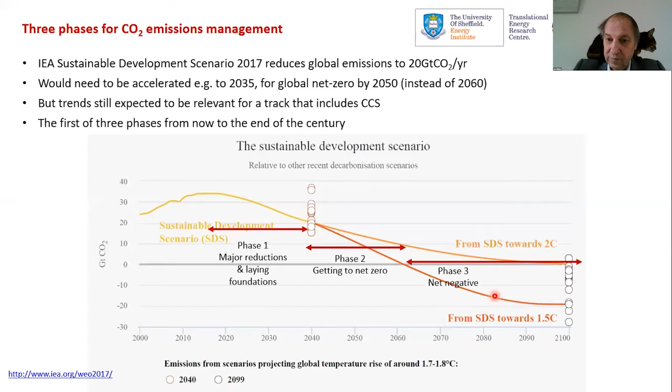Coal is still getting a lot of attention as the villain of the piece on CO2 emissions, although in fact it's not much more than oil in aggregate now.

One of the features you will see, though, in this scenario, and I think this again is something that we can expect to see delivered, is that when you get this downward pressure on demand for oil, demand for coal, and indeed in some respects demand for gas, you see that the prices are soft. Essentially, for all of the commodities in this sort of market, the expectation is that the prices won't increase rapidly. In some cases, they'll go down.

And that, of course, has significant implications for carbon capture and storage power generation, because these are the fuels that will be used in CCS power generation. So, as I say, any scenario, not just this one, that shows severe downward pressure on emissions and lack of unabated use will also naturally tend to give low fossil fuel prices and hence relatively low CCS costs.

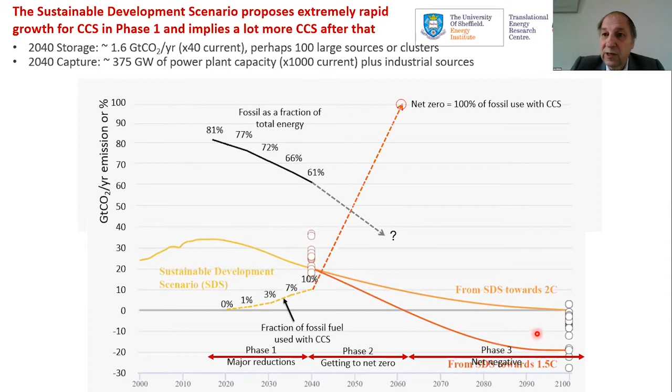This is the energy that's produced. This is the capacity that produces it. So obviously for intermittent renewables, solar and wind, there's relatively more capacity than there is energy generated. Similarly for CCS on coal, as we'll see, I'll discuss it a bit more, there's quite a lot of coal capacity, not so much coal with CCS capacity, but that actually generates a lot of the energy. For gas, there's still a lot of energy generated from unabated capacity, though even there, the gas CCS has a higher load factor.

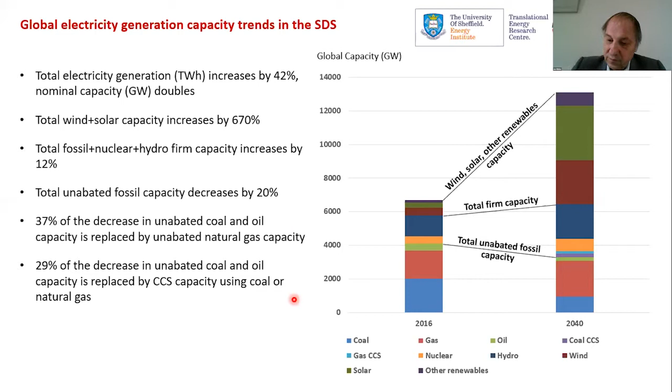Looking at a little bit more detail at coal, because I think it's a good model for what will happen also to gas in the second phase. This is where we were in 2016, not very different now. We've got about 2,000 gigawatts of coal capacity globally, with an average load factor of about 50%. Rather less than half of that is closed in the scenario. Some of it's fitted with CCS, 15%, and that runs with a load factor of 69%.

The rest of it essentially is turned into peaking plant. It's there, it's been paid for. You wouldn't build it as peaking plant, I don't think. It'd be far too expensive, but given it's there, it's reliable. In many cases, you're not even reliant on a gas transmission system. You have a stockpile of coal, which you can use, so that's very good. It's run as peaking with an average fleet load factor of 11%.

And that shows even more here, as I said, this is the total generation from coal, the energy now. There's a big reduction in electrical energy produced from coal, but a lot of what's left is from CCS plants, and there's a small amount from the peaking plants. So a lot of capacity, not doing very much generation, but providing an important service to the grid.

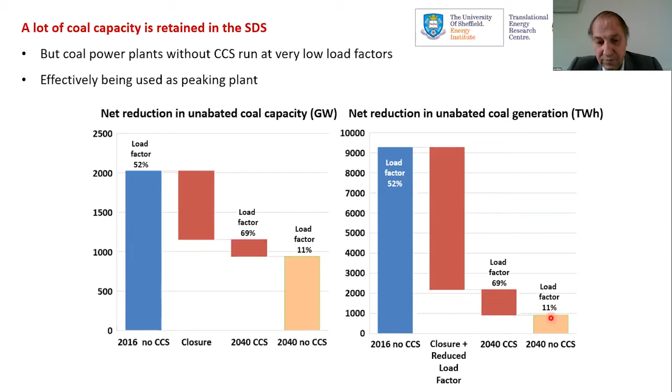In the UK, January, very little solar power, and we sometimes get anticyclones where we get very nice, dry, cold weather with little wind for several weeks.

I usually get very good snow then. You go and have a lot of fun outdoors. It's a little bit like being in Scandinavia. It doesn't last for long.

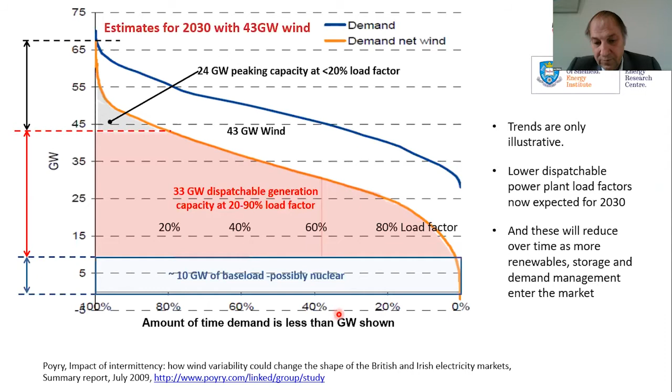So, capture from power plants, what are the characteristics? So in this phase one, where we're seeing the first major reductions and laying foundations for future generation, we expect to see capture on dispatchable power plants with all fuels, probably limited base load. Capture may be stopped for short periods to allow more power to be sent out, but all the plants have to switch on and off. Getting to net zero, you're going to be looking at these peaking power plants, because you've got to go for all sorts of emissions. I don't think that you'll actually, on many of these, capture a lot of the CO2 at source.

You want low load factors. The running costs can be very high, but it's important to keep the capital costs as low as possible. So options there include hydrogen with storage. It's very important that you have hydrogen storage, otherwise your capital costs will go up. Ammonia, we've heard mentioned, biofuels, or synthetic fuels made from CO2 taken from the air.

But actually, if you're going to do that, and this is something that hasn't received enough attention, but it's an obvious way to do it, you can just carry on using fossil fuels, and then instead of taking CO2 and turning it into fuel, which is relatively expensive, you can just bury it, put it away permanently, return it to the geological storage that it came from. So fossil fuels plus carbon dioxide removal via BECCS or DACCS is also a possibility to achieve net zero with these peaking plants.

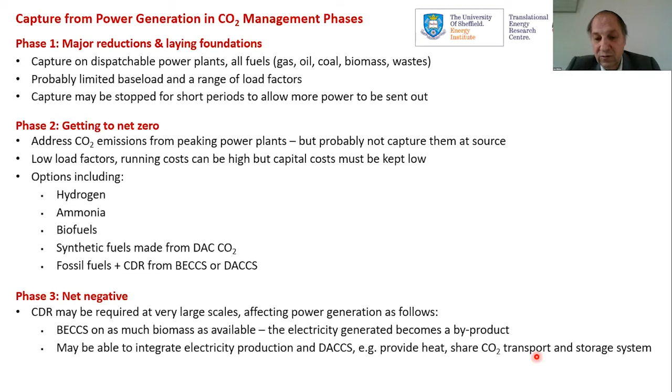So just drilling into a bit more detail, a point we've already made many times, if you're in phase one, power plants have to be dispatchable. As the load factor reduces, obviously capital cost becomes important, and thermal efficiency has a secondary impact, especially at lower fuel costs. You do have to be able to meet periods of peak emergency demand with these dispatchable plants as well as with the peaking plants. There may be some benefit from time shifting the capture penalty if you can do that.

When you're heading for net zero, perhaps not in this first stage, you will need to capture as much CO2 as possible, maybe as much as 99%, which is effectively all of the fossil CO2 from natural gas, or you have to be able to upgrade the plants to do that. People are very concerned about other pollutant emissions as well as CO2.

And in some areas, CCS raises questions about water demand, although the answer to those questions is just appropriate engineering of the plants. Except in some cases, and I think we'll hear more about that, you may well be able to harvest some water from CCS, either in the capture plant or also if you're injecting water into saline aquifers, you may use the produced water.

So just looking at some characteristics, these are from a published study by Wood, formerly AMEC Foster Wheeler, for our energy ministry. This information is available. You can download all of the details and the cost calculation spreadsheet. These are their estimates of the performance of various CCS power plant options.

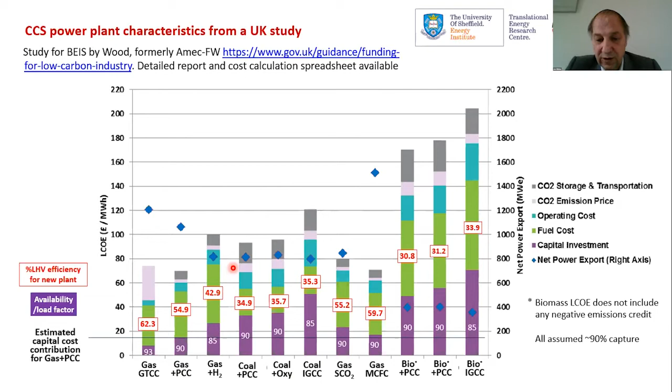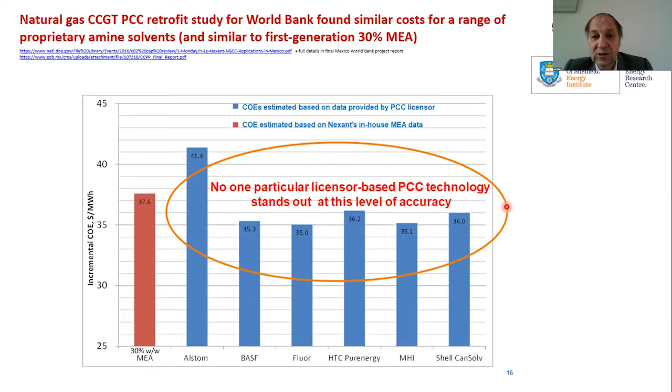So interestingly, when you get down to it, particularly for natural gas, where you're not very sensitive to the energy consumption, there appears to be little difference between the amine offerings when you apply a standard method. If you're more interested in post-combustion capture, where the default would now be 35% by weight MEA, which is a little bit less energy, more compact plant, then we have an open access study there, which is available to look at.

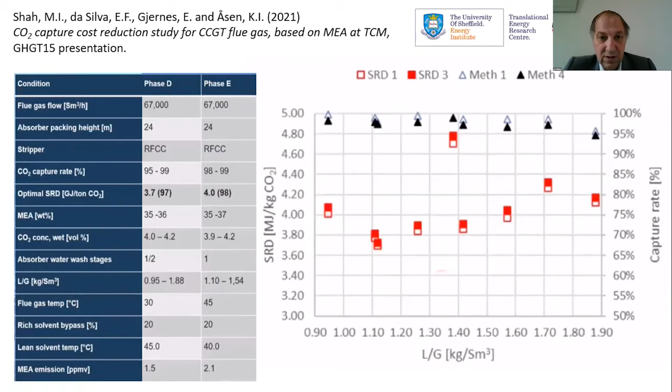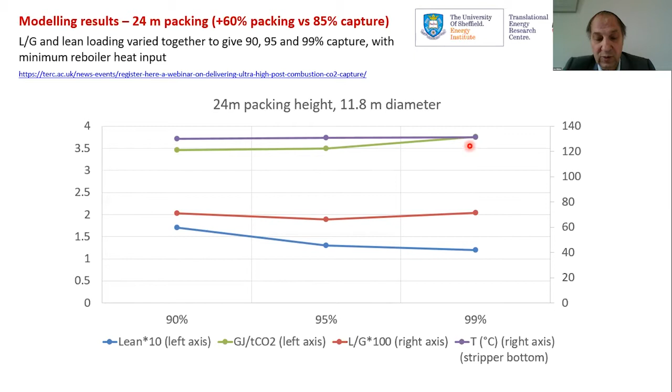Capture levels are also important, and we've just recently seen published levels of capture in the high 90s, above 95%, from actual tests at Test Centre Mongstad, so that's very good. And we've also verified that, mimicked that using modeling at University of Sheffield. And this is taking capture up from 90% to 99%, and the energy requirement, which is the green line, goes up slightly, but not very much. And when you compare it with air capture, it's quite a good deal.

I said you need to stop and start plants. With post-combustion capture, an easy way to keep on capturing while you're doing that is to store the solvent. Store lean solvent and rich solvent, run it through the absorber, and you can keep the same high capture levels all the time.

Some things going on globally. The UK, as I say, we've got lots of different options we're looking at, but it's changing rapidly. It's a competitive situation. The US, there's multiple FEED studies going on for both gas and coal plants. Petra Nova was a coal plant with CCS that was run but is not now operating. And they had some bad experiences with gasification. Canada, there's the Boundary Dam coal plant operating. Netherlands is looking at post-combustion and waste. China is considering coal post-combustion capture retrofits, and they're actually helping Australia as well, the Huaneng Group, with a proposed retrofit. And Japan has a biomass retrofit plant. And there's a number of references, but as I say, it's very hard to keep up to date with what's going on. It's a fast-changing situation, and it's competitive as well, so you don't hear everything.

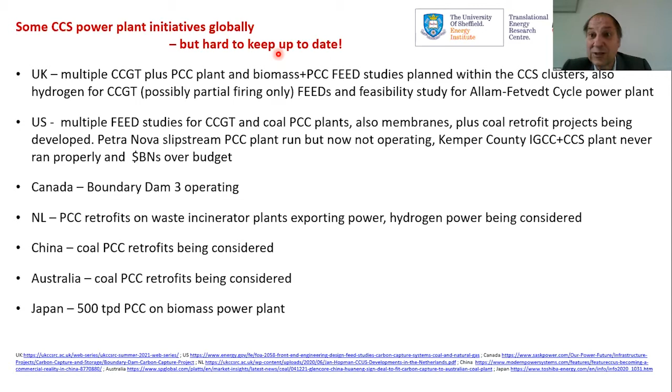So, final words. Power plants with CCS are very important to help deliver net zero emissions. Now they'll, I think, mostly all need to be dispatchable. There may be retrofits on all sorts of power plants, coal, gas, biomass, and oil plants. I'd expect new build gas and biomass plants. Currently, most of the projects being talked about use post-combustion capture using amines, but any technology that can offer reduced capital costs will be competitive. Efficiency, though, I think is going to be less important. However, the capture level is important. We're heading for net zero. The alternative, if you don't capture it on the power plant, is direct air capture or BECCS.

And then pre-combustion capture for power. In principle, it looks attractive because you've got concentrated CO2, but it does appear to be more expensive, except possibly hydrogen for peaking plants with storage. And also, we will expect to see hydrogen use in turbines for power generation where you can't do CO2 transport and storage. So it will happen, but it's not necessarily the cheapest way.

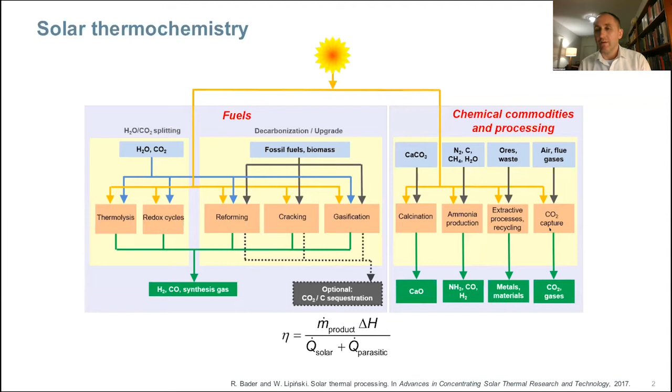or separations of gases. And the third area, not shown in this graph, is thermochemical energy storage that matches concentrated solar power plants or industrial processing systems powered by solar thermal energy at high temperatures. Now, the solar-driven calcination-carbonation chemical looping is a closed loop process, as the name says. So we use a metal oxide, and this metal oxide or sorbent is generated in the endothermic calcination step of a carbonate. Now, this process is typically highly endothermic, and it can be matched with the high temperature heat provided by solar thermal systems.

Now, depending on the application, we may have different streams of carbon dioxide into and out of the system. For example, if we just separate CO2 from flue gases, this pure CO2 can be used for production of solar fuels, for example, towards solar synthesis gas for renewable kerosene for aviation.

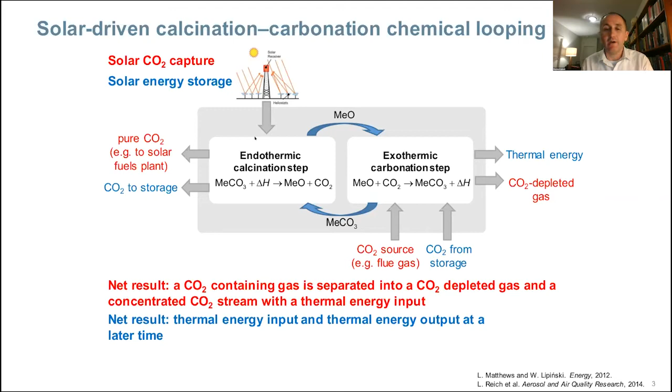Different metal oxides have been proposed for this process: calcium, strontium, manganese, magnesium, barium, and others. As I mentioned already, they have high theoretical storage and capture capacity. For example, for calcium carbonate, this is 1778 kilojoules per kilogram, which is 3 to 4 times the energy density of commercial molten salt storage that typically matches concentrating solar power plants. Calcium carbonate is abundant and low cost, but there are challenges with loss of reactivity and material degradation, and we need to develop high temperature solar reactor technology, which is not trivial.

Now, I will guide you through this process and the different challenges in realizing solar-driven chemical looping processes by considering different length scales, from the smallest scales typical of sorbent particles, through groups of particles such as packed beds or fluidized beds, to the solar reactor level. And I'm going to show you some examples. So let's start with analyses typical of sorbent particles. At this level, we are interested in investigating the effect of properties of individual particles, such as their internal structure, porosity, and overall size, on the extent of chemical reactions, both for the calcination and carbonation steps.

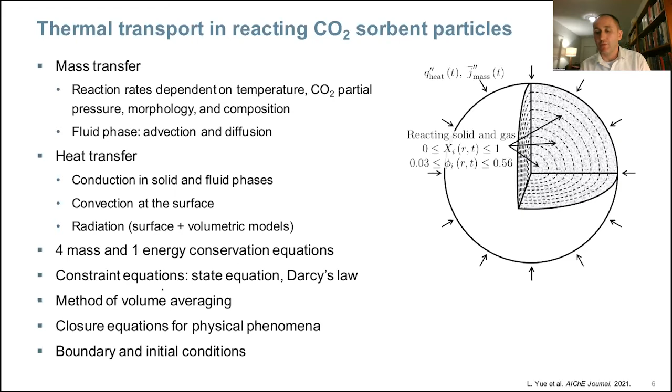And here we have used combined numerical and experimental methodologies. On the numerical side, we have developed heat and mass transfer models coupled to the chemical kinetics of calcination and carbonation, with realistic properties corresponding to those of single calcium carbonate or calcium oxide particles. Now, modeling itself can be quite off from actual results if our input data contain some uncertainties. So it's important to also conduct experiments to validate these models.

We have developed a quite fine setup that uses a thermogravimetric analyzer in which we have individual particles placed in the crucibles. And here you can see the particles actually after cycling, after calcination, when they develop a crust of carbonate around those particles. So these are two examples.

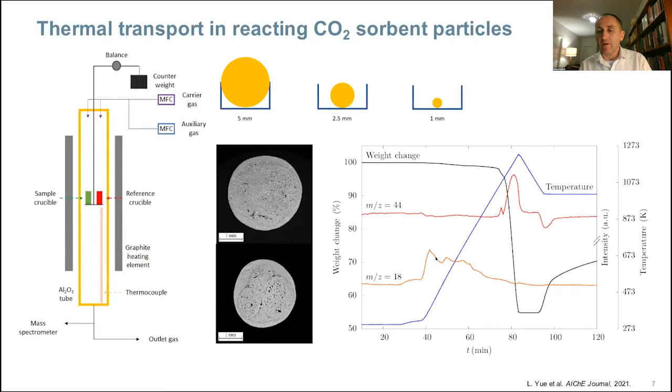You can see here the weight loss for a typical experiment. So first we have calcination, and then we have carbonation. We have here also two signals on the mass spec for carbon dioxide and for water. There is usually water in the initial step of this multi-step process, that is water bound in the structure of the carbonate itself.

Now, when we compare the original simulation results to the experimental results, we can see that, and this is not surprising, there is typically some discrepancy. So our sophisticated model was tuned by scrutinizing some of the input parameters and properties, and eventually we were able to match the experimentally measured results. In this case, this is the overall extent of the calcination reaction, followed by the extent of the carbonation reaction. So the match is good, and it was tougher actually for the carbonation step than for the calcination step.

Once the model was adjusted, we were able to predict the behavior of these individual sorbent particles as a function of their size, as a function of the composition of the reactive gas atmosphere, with variations of the CO2 concentration from 25 to 50 to 100% for particles of selected size.

So now let's move on to the next scale. I'm going to show you this next scale that is weakly coupled to the smaller scale, which means we follow the hierarchical coupling process in the overall analysis, but the links between the scales are still very challenging. We deal here with very disparate length scales.

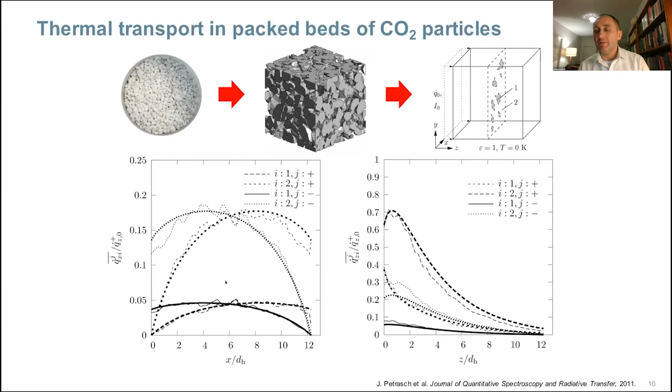I'm talking about solar thermochemical looping, which means the process is driven by concentrated solar radiation, and radiative properties are very important for precise modeling of the systems. So with this approach, we can actually achieve quite good accuracy of the radiative and other characteristics of such packed beds that can be used in simulations of scale-up systems at the reactor levels.

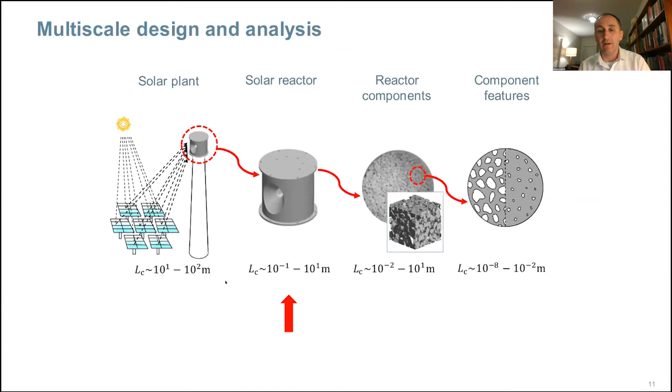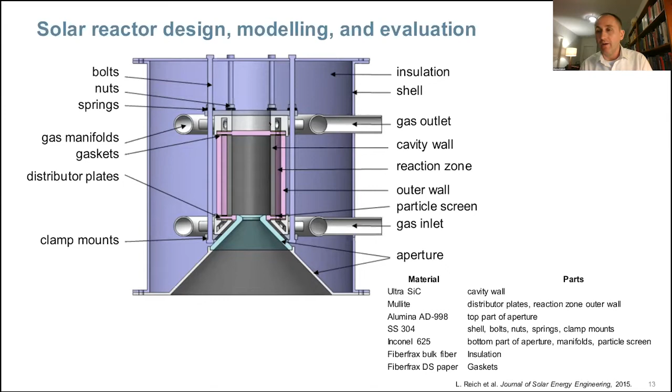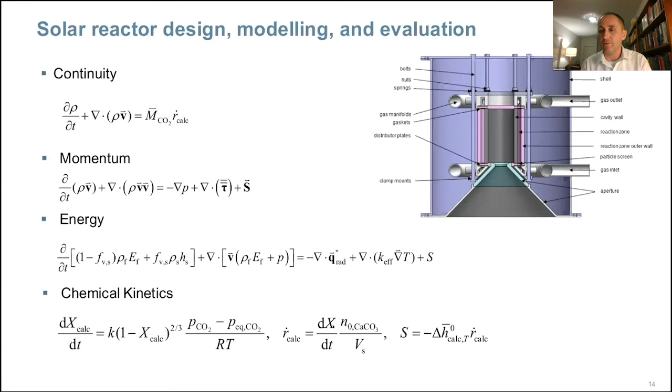Again, we developed a comprehensive heat and mass transfer model based on the continuity, momentum, and energy equations coupled to chemical kinetics of calcination and carbonation. This model was implemented in ANSYS Fluent with extensions to account for radiative properties and reaction kinetics through user-defined functions. And here I'm showing sample results.

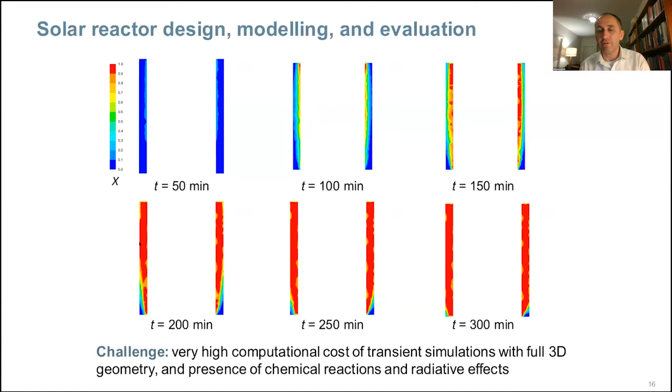These simulations are extremely time consuming. Even with vast computational resources, 3D geometries in presence of nonlinear kinetic effects and radiative transfer effects require days to complete single cases. So now let me show you the experimental setup that we have prepared to test the actual reactor prototype. It will be tested in the new high-flux solar simulator, which consists of 18 radiation modules.

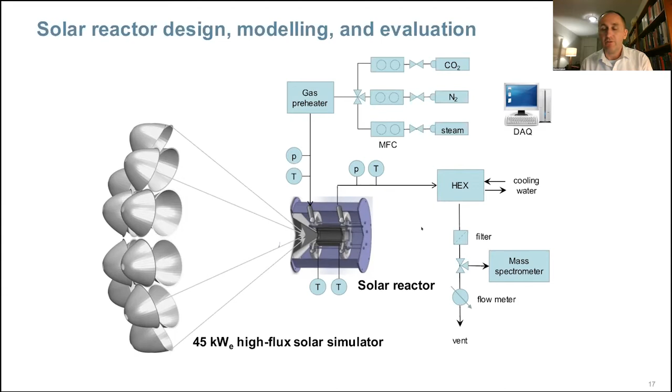The reactor will be placed in the focus, and we will have different gases flowing into the reactor depending on the process step, calcination or carbonation, where we can emulate any composition of flue gases or other exhaust gases from industrial processes. And the outlet gases are analyzed by a mass spectrometer, which will help to close the mass balance in the reactor and also calculate its efficiency.

To conclude my presentation, the calcination, carbonation, chemical looping processes are thermodynamically compatible with state-of-the-art solar concentrators. It's not difficult to achieve the temperature of calcination of 900 degrees Celsius. This is the actual state-of-the-art solar tower technology, or even now beam down technologies, which allow placement of the reactors at the ground level, and this avoids many complications of how we transport material to the solar tower.

The two-step process scales up well because the materials are low cost. These are like calcium carbonate, but they are limited only to point sources of carbon dioxide, which means these processes are suitable for carbon capture, but not for direct carbon removal from air. The reasons are thermodynamic. The concentration of CO2 in the atmosphere is so low that basically flowing large quantities of air through our packed bed of carbonate-based materials would lead to thermal losses and also to mechanical losses.

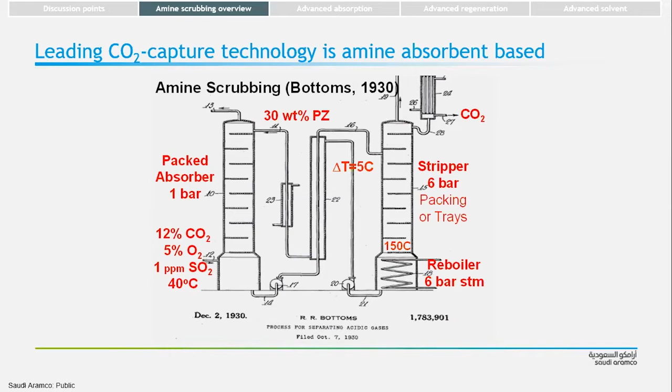More than 30 CO2 commercial applications for flue gases from gas-fired power plants are available, with more than 20 employing Fluor technology using 30% MEA. The largest of these was the gas-fired 1,000 ton per day power plant at Lubbock in 1983. MHI has more than 10 plants that use KS1, proprietary amine solvents.

Only a few plants have been constructed to capture CO2 from coal-fired flue gases. Lummus Technology owns a process that used 20% MEA in 4 operating units. Cansolv of Shell started operating an amine system at Boundary Dam, Saskatchewan in 2014. MHI also started a 4,800 ton per day capture system in 2016 at Thompsons, Texas.

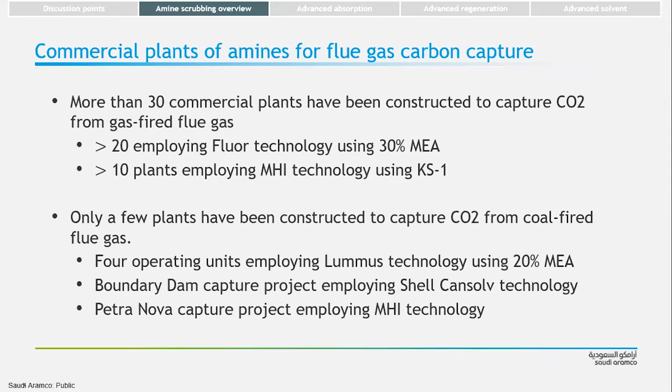Mohammed? Yes. Sorry to interrupt. Can you turn your camera on? Yeah, I'm sorry. Yeah, do you see me? Yeah, good. Thank you. I'm sorry.

4 classes of aqueous liquid absorbents can be considered for CO2 absorption and stripping. They differ in the heat of CO2 absorption, kinetics of CO2 absorption, and the intrinsic CO2 stoichiometry. The hot potassium carbonate process is offered by UOP. It operates isothermally near 100 C with pressure swing regeneration. But because its heat of absorption is low, it's unfavorable for thermal swing regeneration.

Tertiary amines such as MDEA are usually used in blends with rate promoters such as piperazine. Hindered amines like aminomethylpropanol can be used alone or in combination with rate promoters. Secondary or primary amines such as MEA and piperazine can be used alone or as rate promoters with tertiary hindered amines or potassium carbonate.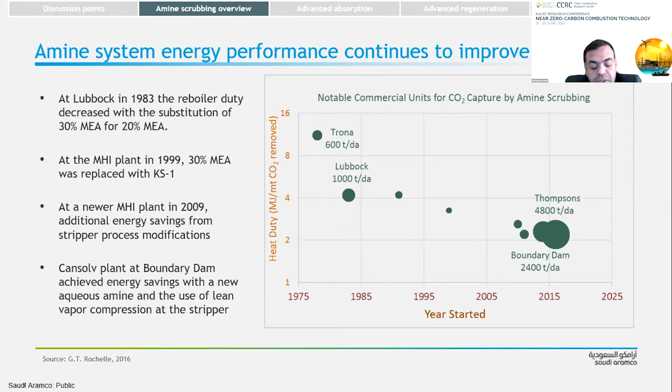The Cansolv plant at Boundary Dam, started in 2014 as I mentioned, achieved energy savings with a new aqueous amine solution and with the use of a stripper modification, lean vapor compression at the stripper, that I will discuss in the next few slides.

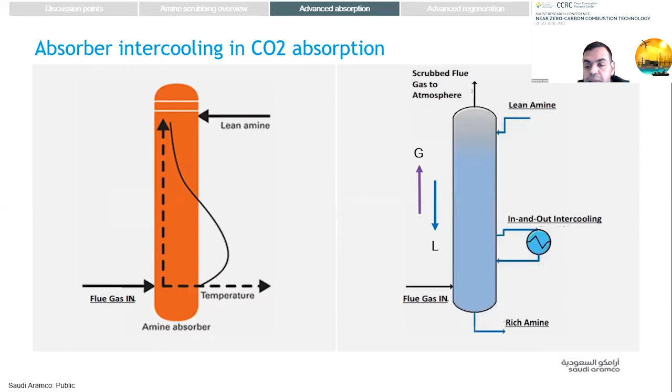CO2 absorption is exothermic, as you can see here in this figure, and results in a temperature bulge in the absorber. And the higher solvent temperature limits the maximum capacity of the solvent. So cooling the solvent at intermediate locations in the column, what we call intercooling, is going to help by removing the heat generated, which can help mitigate the capacity and driving force limitations.

This figure basically shows the trade-off of total packing area with the liquid rate. An isothermal absorber would require less packing and a lower liquid rate to achieve the same performance. In many cases, intercooling may be used to reduce the absorber packing cost and increase the rich loading. As you can see here, at a given lean loading and infinite packing area, there is a minimum liquid rate, L over G.

And similar to the distillation process, the economic optimum packing area probably will happen at a liquid rate between 1.1 and 1.3 times the minimum liquid rate.

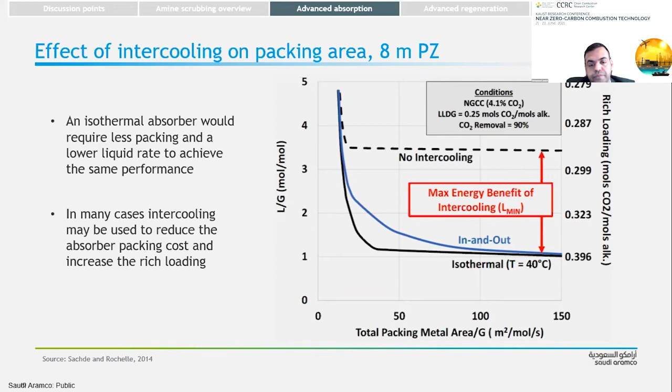This figure shows the potential effect of intercooling on the liquid rate. As you can see here, this is with 8 molal piperazine at 4% inlet CO2 concentration at a lean loading of 0.21 mol CO2 per equivalent piperazine. The minimum liquid flow rate is almost 3.5 times that of an isothermal absorber. A single stage of in and out intercooling near the middle of the column of the absorber reduces this effect by a factor of 2 at a lean loading greater than 0.26.

The contactor design for the absorber for CO2 capture has improved from that used for acid gas treating. The larger demonstrations use modern structured packing with larger corrugation angle to minimize the pressure drop while maintaining equivalent wetted area for mass transfer. The earliest absorber designs in capture systems were round.

In the SaskPower plant at Boundary Dam, Saskatchewan, the commercial scale used the rectangular absorber. The MHI design at Thompsons, the Petra Nova project, used the rectangular absorber. Full-scale commercial designs will probably use a single rectangular absorber to treat all of the flue gases from one boiler.

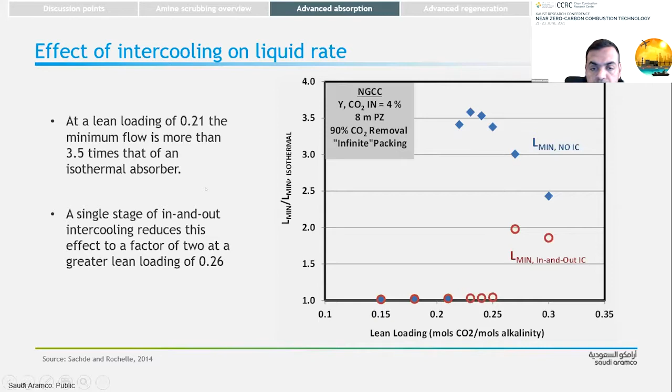So this figure compares the energy performance of 3 stripper enhancements to that of simple stripping. One issue with simple stripping is that it loses efficiency because of the water vapor that passes overhead and is condensed without heat recovery. Numerous process configurations have been proposed and tested to address this weakness. And these 3 stripper enhancements are the lean vapor compression, the interheated stripper, and the advanced flash stripper. Large-scale commercial applications will probably utilize these or similar configurations to enhance the energy performance.

And as you can see here in this figure, the selected lean loading can be used to minimize the equivalent work. At higher lean loading, the working capacity is reduced and the sensible heat requirement increases. At lower lean loading, more steam is required, basically to strip the CO2 from the amine solution. Lower lean loading also improves the rate behavior of the absorber.

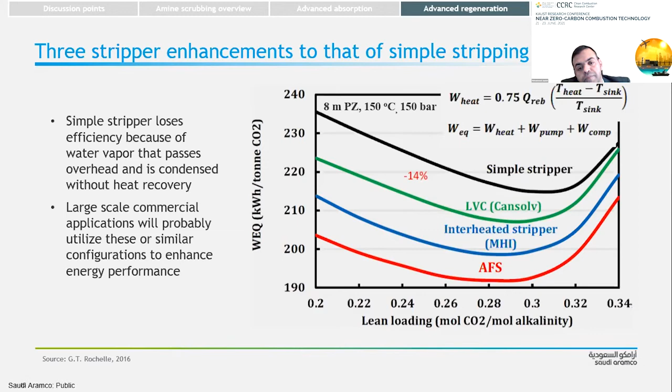This figure shows the interheated stripper. This is probably an important part of the energy savings process used by MHI in several smaller commercial units and adapted for the 240 megawatt plant at Petra Nova. Absorption liquid, as you can see here, is extracted from the middle of the stripper and pumped through this heat exchanger. And the hot lean amine solution is in series with the main heat exchanger here.

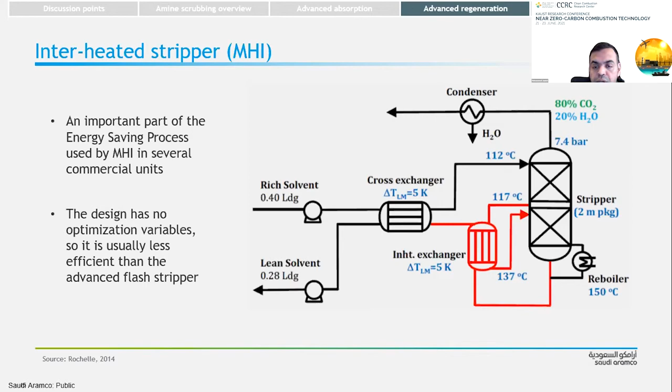It's not as flexible as the advanced flash stripper, since the compressor needs to run at a maximum single stage compression ratio of 1.8 to 2.2. This figure shows the electricity burden with advanced amine scrubbing, as you can see here. And they are approaching the minimum work to separate CO2 and compress it to 150 bar.

The 2 demonstration projects, the one at Boundary Dam and Petra Nova, are expected to achieve this 210 to 220 kilowatt hour per ton of CO2 removed. The advanced flash stripper is expected probably to reduce this burden by an additional 4%.

But these process modifications or innovations are probably producing diminishing returns, so it's possible to expect the ultimate requirement of 200 kilowatt hour per ton of CO2 with a thermodynamic efficiency of 56% for commercial units.

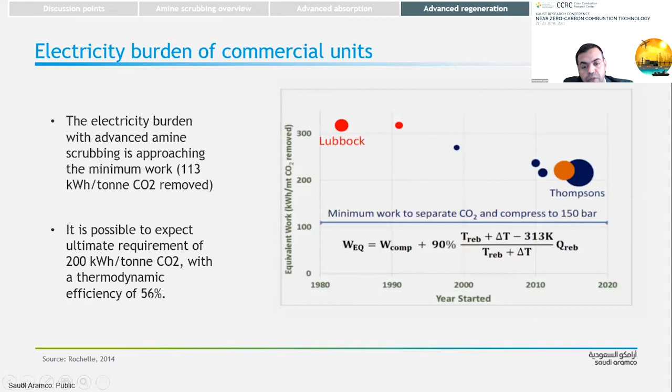The energy performance of a liquid absorbent is dominated by 4 energy properties: liquid absorption capacity, CO2 absorption rate, heat of CO2 absorption, and the Tmax from thermal degradation. The Tmax and the heat of absorption basically determine the compressor, reboiler, and stripper capital cost and lost work. The rate of CO2 absorption determines the absorber capital cost, the packing requirement, and the loss of work as a driving force.

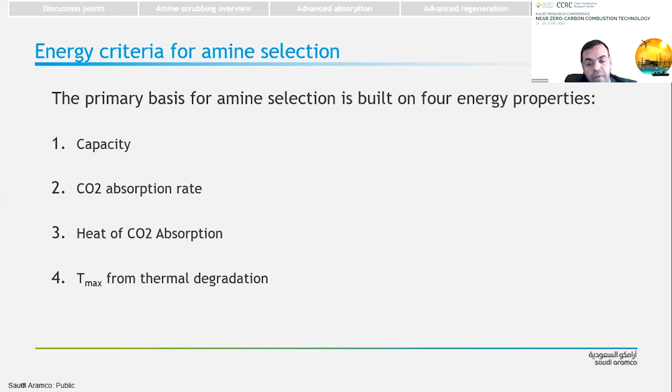There are other important properties to watch for when selecting an amine: oxidative degradation, nitrosamine formation, amine volatility, amine aerosol emissions, molecular weight, amine cost and availability, and amine corrosion. Amine oxidative degradation is a common problem for CO2 capture from flue gases. Even with numerous detailed investigations over the past 15 years, there is not yet a clear understanding of the mechanism by which the degradation takes place.

On nitrosamine formation, MHI and other technology providers have all reported successful testing of countermeasures to minimize amine aerosols. But even with these measures, this is still an open problem area. The mechanisms and countermeasures are not yet completely understood. So this is an open area for research and more innovation.

So this table, Mohammed, can you wrap this? Yeah. Another minute. Yeah.

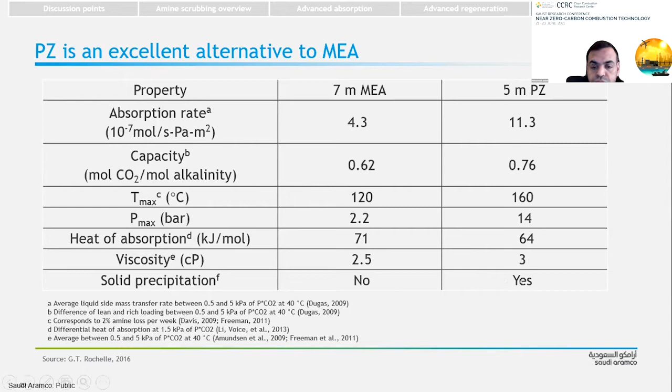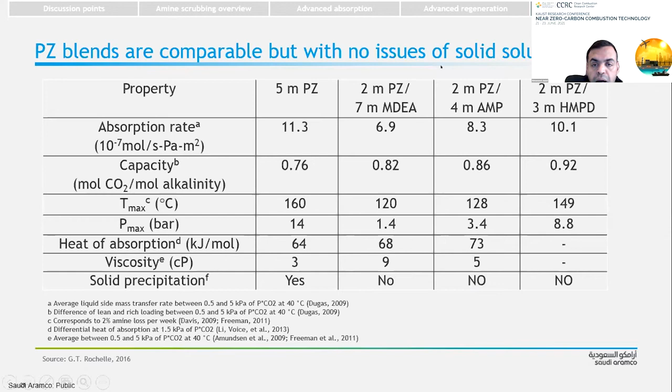Piperazine is an excellent absorbent compared to 7 molal MEA. As you can see, absorption rate is higher, capacity is higher, 22%. Unfortunately, MEA is prone to oxidative degradation. Piperazine has the highest rate of CO2 absorption, as I mentioned. But the problem with piperazine is the issue of solid solubility. Blending piperazine with other amines will give basically comparable properties in capacity and rate of CO2 absorption, but with no issue of solid solubility.

So in conclusion, amine scrubbing will be a dominant technology for post-combustion capture. Second generation amine scrubbing provides improved energy performance, with electricity burden approaching 200 kilowatt hour per ton CO2 in coal-fired applications. The 5 molal piperazine with absorber intercooling and the advanced flash stripper should serve as the baseline for future improvements in post-combustion capture. Amine aerosol emissions and amine oxidation are not yet completely understood and managed.

So while my colleague Dr. Mohammed presented options for CO2 capture with regeneration temperature above 100 degrees C, I'm taking you on a different journey below minus 100 degrees C in this quest of finding a cost-effective CO2 capture solution for our energy sector. So first, let us define the cryogenic space. We talk about cryogenic CO2 capture, but is it really cryogenic CO2 capture?

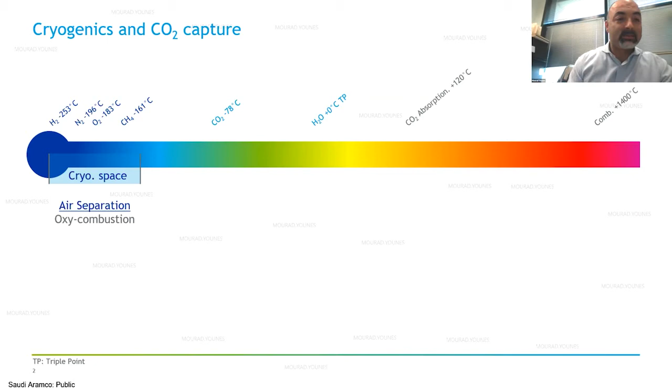According to the International Congress of Refrigeration in the 1970s, they adopted the cryogenic space to be between 0 Kelvin and 120 Kelvin, which means about minus 153 degrees Celsius. And in this case, we can find air separation as one means that can be linked to CO2 capture. Why? Because we can use the oxygen from the air and combust it with the fuel at high temperature, bring these high concentration CO2 flue gases to about minus 40 degrees C at pressure, and then distill the CO2, purify it and reject all the nitrogen and other impurities.

So this is the first application where eventually we can talk a little bit about cryogenics. But what about low concentration gases, like, for example, atmospheric pressure boilers or gas turbines? In this case, we really need to go a bit further down in temperature. For the boilers, we will start capturing CO2 from about minus 100 degrees C to about minus 120 degrees C if we're looking for 90% CO2 capture capacity. In the case of gas turbines, we will start at about minus 110 and go all the way to minus 130 degrees C, as you can see here.

So in this space, it's not really cryogenic space, but in some instances in the literature, we have seen the connotation of high temperature cryogenic. Nevertheless, we will call it cryogenic for our purpose today and follow up these slides.

So what happens in our cooling of these flue gases down to minus 120 or minus 100 degrees C? We will be crossing many triple points of different substances that could be present in the flue gases. For example, mercury at minus 39, SO2 at minus 76, CO2 at minus 56, and that's why we need to capture the CO2 in solid phase. But most importantly, what is abundant in any flue gas is water, which is at 0 degrees C. This means that we have to take care of all these impurities while we are taking care of the CO2

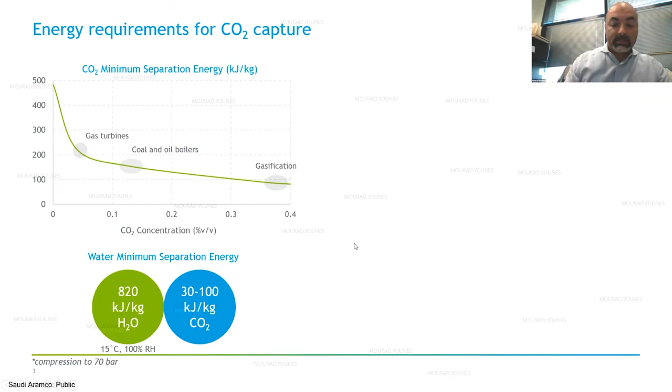So if we take 60% efficiency on this ideal, and consider the desublimation energy of CO2, we end up with an energy penalty of about 1,000 to 1,200 kilojoules per kilogram. And we're talking here about electricity, compared to other technologies that could require heat or a combination of heat and electricity.

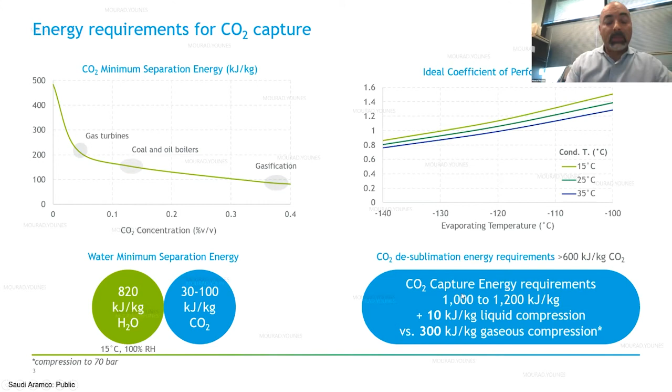The good thing about capturing the CO2 in solid phase is the possibility to melt the CO2 and then compress it in liquid phase. And liquid compression is certainly much cheaper than gas compression, so we'll be saving on capex as well as on energy demand. As you can see, it's just 10 kilojoules per kilogram versus 300. So this is one of the areas where cryogenic systems could be more adapted to some of these applications.

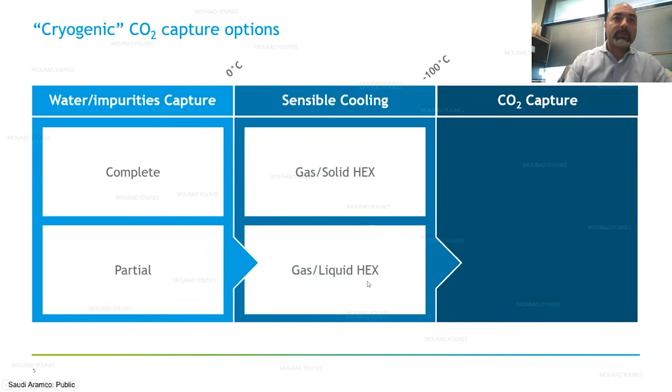Regarding the water or impurities, we can remove them completely or partially, depending on how we want to deal with them and what system we would be using. As for the sensible cooling, we have two options here: either an indirect contact heat exchanger, like a gas-solid interface, or a direct contact heat exchanger with gas and liquid interfaces. And towards the end, for the CO2 capture, we need a refrigeration system, which will be the heart of our CO2 capture system, as well as a way to contact this coldness with the CO2, either through a solid-solid interface or a solid-liquid interface, for example.

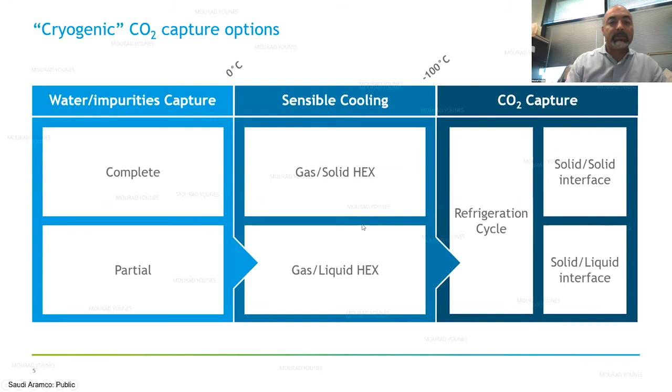So zooming into the first part of the process, we can certainly remove the water with various means, right? They are all commercial. We are using them in air separation units today. They will avoid any further processing requirements for these impurities downstream and avoid freezing and having to deal with solids other than the solid CO2. Nevertheless, they could be capital intensive or would require a lot of integration with the process if we have to make them really energy efficient.

The other approach is partial capture. For example, here we're talking down to 0 degrees C, and in this case we will be capturing water in liquid phase, and still about 5 grams of water would remain in the flue gases, which is still significant and we have to deal with it in the following stages. Therefore it will add complexity to the system, but could eventually lead to a lower energy penalty. So there could be a trade-off depending on the application for the first stage of removing impurities and water from the system.

Moving down the temperature, we have to cool down the flue gases to -100 degrees C, right? And here we can use the very well-known aluminum brazed heat exchangers that are used in the cryogenic space, and these heat exchangers will offer a very low temperature pinch and a lot of compactness. Nevertheless, they can accumulate pressure drop if you're not removing all the contaminants, because of the deposition of various impurities in the stream.

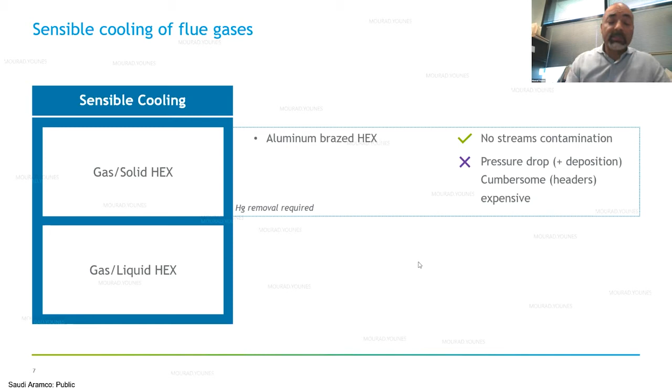And most importantly, they could be cumbersome at large scale when we have to deal with a lot of headers and collection of headers. This will require a lot of manpower for welding and all these things, which eventually increases the price of these heat exchangers or of the system. Nevertheless, in terms of cooling, they will be very effective, with no stream contamination, and they can potentially integrate a part of the refrigeration system along with the flue gas cooling.

The second option is to go with direct contact heat exchangers. Here the ask is a bit more difficult in terms of finding the proper liquid that has to contact these flue gases down to the required temperature. It will be effective, certainly. Capex of a direct contact heat exchanger is very low, so it could be an economical solution. Nevertheless, we have to deal with the liquid medium losses and possible contamination of the CO2 or of the liquid that's in direct contact with the streams, and then it has to be regenerated at one point in time.

I will come back to this and the capex later on towards the end, as Professor Gibbins indicated. Depending on whether we're designing for a base load application or for a peaker, you would look at optimizing your system differently, right? And this is a perfect way to say, okay, where do I want to spend my capex? Would I spend it here or somewhere else, depending on how many hours I have to run my system?

Moving down the line, we get to the heart of the system, which is the refrigeration system. This is where all the irreversibilities are produced, in a way, so this is where we need to be very effective and efficient in terms of cost and energy penalty. Various architectures are in the literature regarding how to go down to low temperatures. Here on the left-hand side, for example, you can see a first loop, a second loop, and a third loop of 3 different refrigerants, 3 different compressors. Here are the condensers that would be integrated differently in the evapocondensers, to get to the required temperature for the CO2 capture here towards the end.

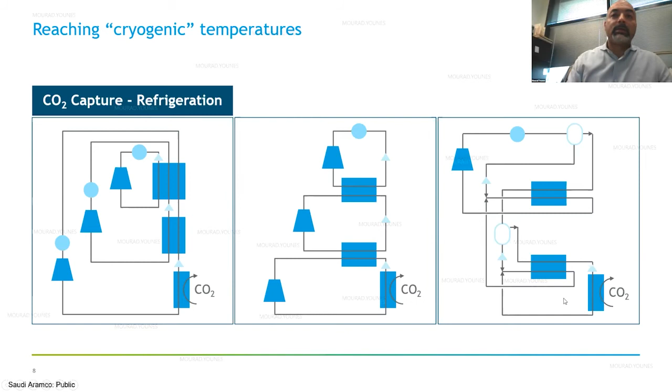So I'm not saying that this is the best configuration. I'm just saying that there could be different possibilities, different refrigerants that could be used, different operating points, different controls and different capacity. Just one point regarding this final stage that is really important: the CO2 capture part, and how the enthalpy gradient would look at our evaporator when capturing the CO2.

So here I'm showing the CO2 saturation pressure as a function of the temperature. And you can see, for example, in the case of boiler flue gases, capturing the CO2 between -100 and -105, or between -115 and -120, is totally different. We will be capturing 5 times more energy in the first degrees of CO2 capture compared to the end, and it's not linear.

So if you have a fixed evaporating temperature at -125 or -130, it means you have a lot of irreversibility, especially for the highest demand of energy, which occurs in the first 5 or 10 degrees C of your CO2 capture. So either you have to work with a blend of refrigerants, and then your penalty will move from the evaporator side to the condenser side, or you have to operate a 2-stage expansion system where you expand to a first pressure, let's say at -110, capture a little at the high temperature, and then have a different pressure level at -125 and capture the remaining CO2.

Certainly, this will increase the capex, but it will increase your efficiency and reduce your penalty on the CO2 capture cost. So therefore, it is important to know what we want to design for and what system we have to operate, and bear in mind the capex that we have to endure for our system to know how to design it.

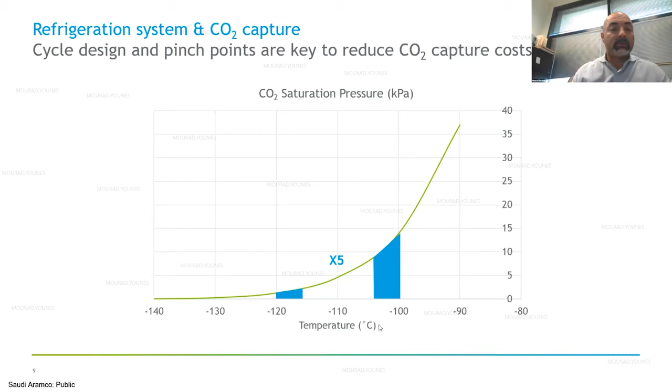So this means that you have to recirculate a lot of gaseous CO2 at very low temperature in order to get the required CO2 capture efficiency. And therefore I personally have not seen any system that was developed based on this principle beyond just lab work.

And the benefit of such a system is certainly there is no cross-contamination between the fluid and your CO2. Nevertheless, the drawback is once you have solid, you have to deal with your solid. So either with a rotary process or a batch process, and this will certainly increase the surface area of your heat exchanger, and then the capital expenses, right?

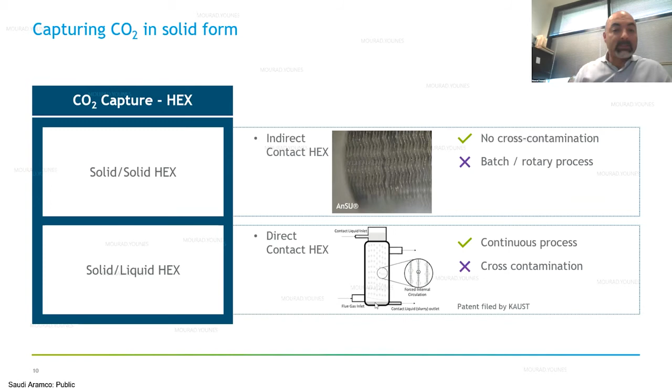So it depends on what you have in your feedstock as well, right? We talked about impurities, SOx, water and mercury. Mercury has to be removed early on if we have aluminum heat exchangers, because aluminum and mercury don't go together at all. So depending on the initial condition of your flue gas, you have to decide to go with one configuration or the other, and there is no single configuration that will beat everything for all applications. And this is the case actually for any CO2 capture technology.

So we don't have a silver bullet, in my opinion, and the right CCS will depend on the ambient conditions, the CO2 concentration and the flue gas that we're designing for, the impurities, and the CO2 end use. For example, if we're looking at liquid CO2, or CO2 for EOR applications with very stringent oxygen content, or CO2 with less stringent specs, for example in saline formation, your choice for your CO2 capture system could be different.

Another parameter, for example, is the size. Depending on the size, some systems are scalable while others are not. The availability of auxiliaries: in some processes you will need just electricity, which is the case for cryogenic CO2 capture, while in others you might need a combination of electricity to drive the pumps, compressors and fans, as well as steam to regenerate your solvent or sorbent or whatever medium you're using.

And last but not least, the load, right? Are we operating at high load or low load? Then the capex will become important, and this is where you would decide to go with the system with the lower capex. So with all these parameters, if I try to map our cryogenic technology, we'll certainly find a lot of areas where cryogenic systems make sense, right?

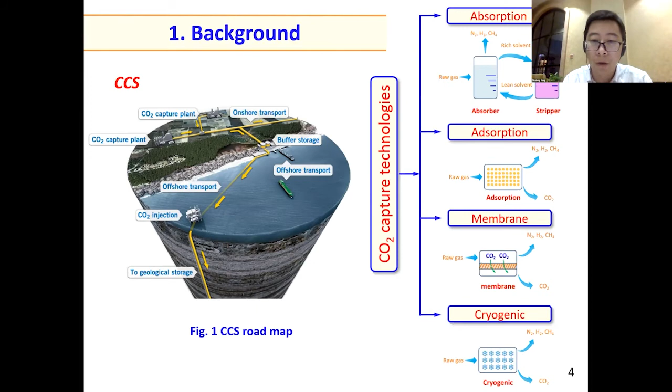As we know, worldwide, especially in China, every year we discharge a huge amount of CO2 due to, for example, fossil fuel utilization. So in China, we have a very targeted requirement to reduce CO2 emission and control CO2 discharge. So in China, we have so many scientists and researchers focused on research related to CO2 capture, storage, and utilization. And just now several professors have introduced different technologies, for example, CO2 absorption, and of course we have other choices, for example, membrane CO2 separation and cryogenic, also named low temperature CO2 capture. Based on this, we can separate CO2 from industry emissions, for example, coal-fired power plants and cement plants.

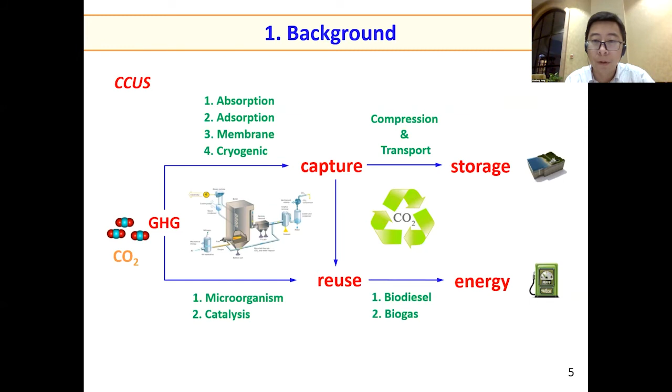And then we have two choices. The first choice is to store CO2. And the other choice is reuse. Means we can transfer CO2 into, for example, bioenergy or biomaterials or some other resource we can reuse in our daily life. So this is the whole roadmap: CO2 capture and storage and utilization. And my interest is focused on CO2 capture by low temperature technology, which we also name cryogenic CO2 capture.

Why I focus on low temperature or cryogenic CO2 capture: we know most CO2 is emitted from high temperature conditions, for example, the flue gas from the coal-fired power plant. So normally we can consider some middle temperature or high temperature technology to separate CO2. But after we separate CO2, we need to compress it and transport it to the storage site or utilization site. So in this stage, we need high purity CO2. If we choose cryogenic technology, we have some advantage. For example, we can obtain high purity liquid form CO2 or solid form CO2. That's why I focus on the low temperature CO2 separation technology.

And just now, Professor Younes introduced some conditions for cryogenic CO2 capture. Here, I want to also mention something.

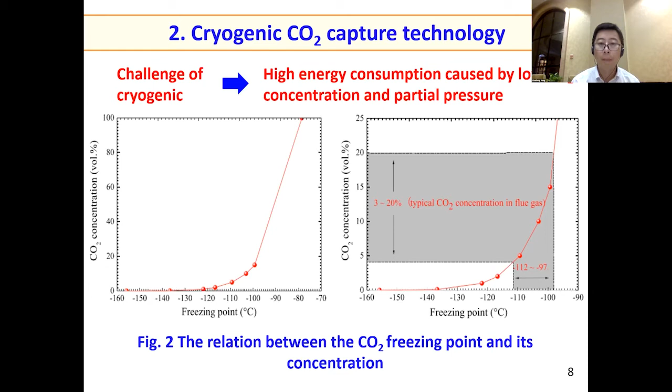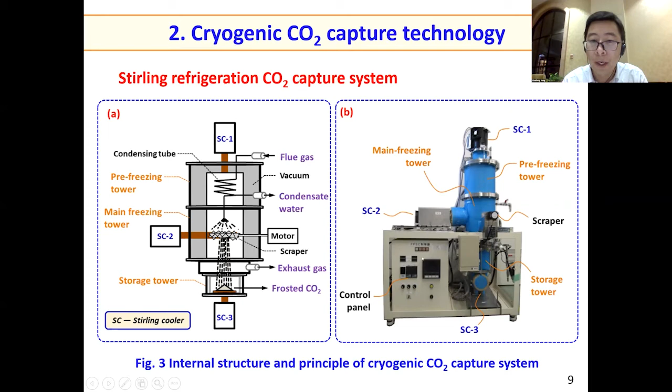And here, under the minus 100 to minus 80 centigrade condition, the CO2 can be separated in the solid form and frost on the heat exchanger. And then we use a scraper to separate the solid CO2, store the dry ice in the storage tower, and take it out. So this is the real picture of the system I designed. Here you can see the main freezing tower, the pre-freezing tower, the storage tower, and the control panel. And also I tested the CO2 frost density change process.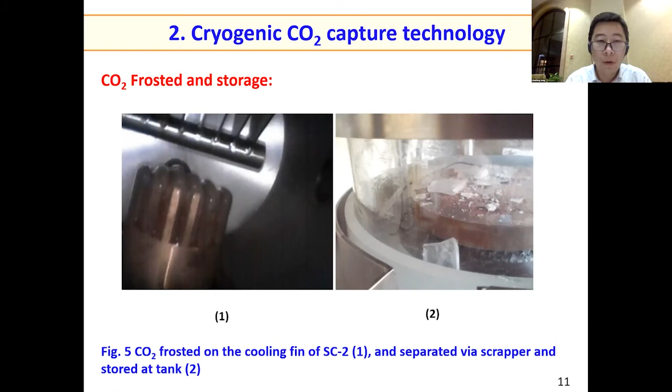And this is the real picture. Here you can see the dry ice we obtained in the system, from the gas phase to the solid phase. And actually, energy consumption is a very important factor for different CO2 capture technologies. As we know, if we want to apply each technology in commercial conditions, we need to overcome the challenge of energy consumption. So I also investigated the energy consumption of my system.

So you can see in the lab scale, we can separate most of the CO2 from the simulated flue gas and use around 0.6 electrical energy to capture the CO2. So at least in the lab scale, the energy consumption is not so high. But if we want to enlarge the scale, maybe the energy will increase. So it's not enough. Based on this, I designed cryogenic combined with other methods. Just now I mentioned we have different choices, and in my opinion, I want to combine cryogenic with some other process, for example, absorption or membrane or adsorption.

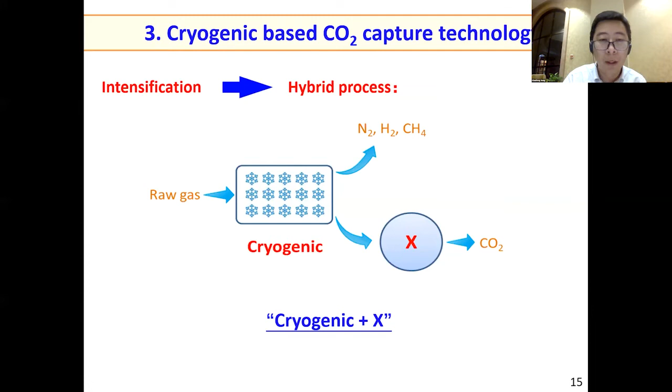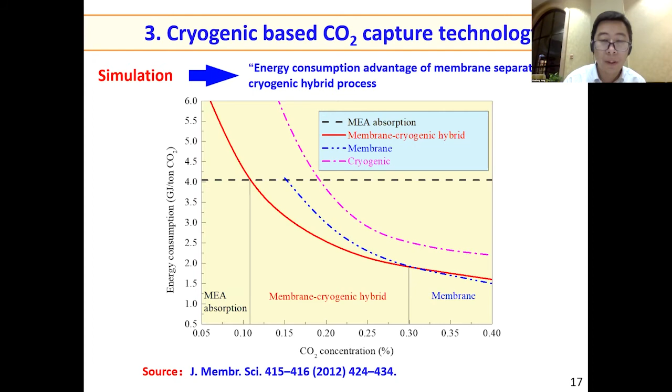So I tested different arrangements, for example, cryogenic and membrane, cryogenic and hydrate, and cryogenic and absorption. One interesting thing is when we tested membrane combined with cryogenic, this is a simulation result, we found a very interesting result. When the CO2 concentration is between 10% and around 30%, the energy consumption of the membrane and cryogenic process is lower than the MEA process, pure membrane and pure cryogenic. So that means if we combine cryogenic and membrane together, it may need less energy than the other technologies.

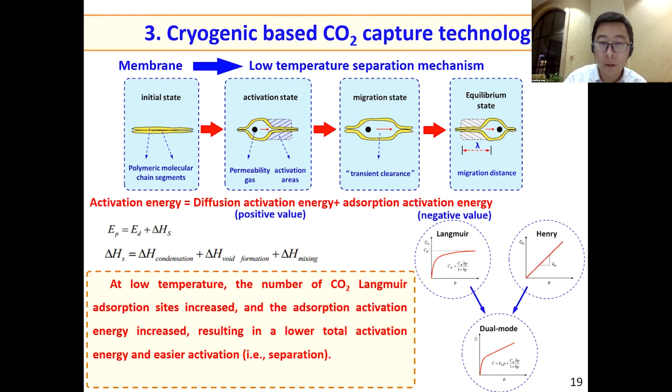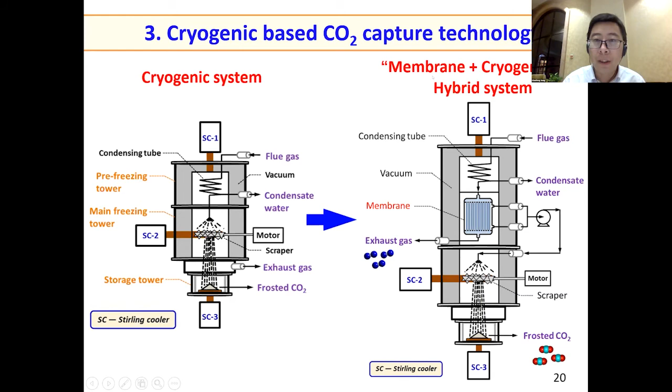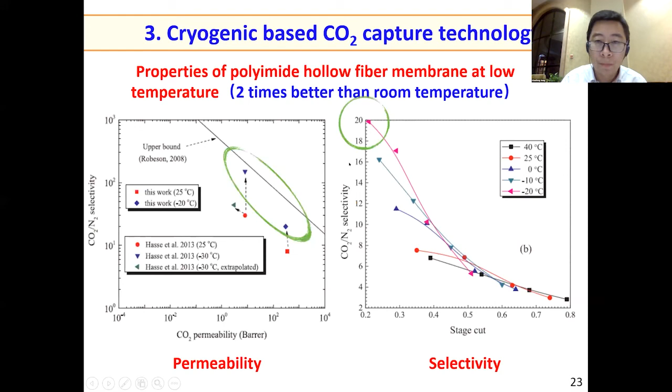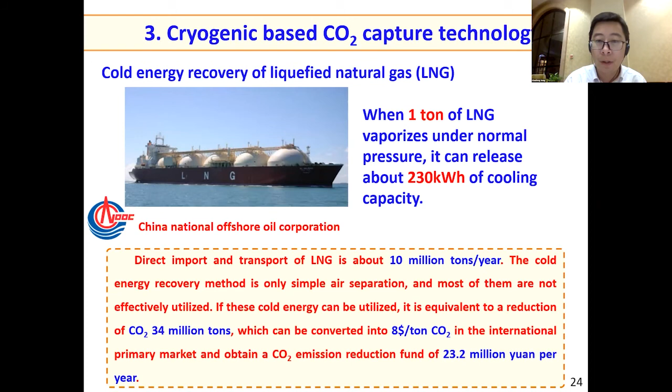And of course, we have applied our idea in a Chinese wastewater treatment plant to upgrade the biogas. So in our process, we can obtain food grade liquefied CO2, and at the same time, we can obtain high purity biomethane, namely bio-natural gas. So that's the good result.

And now, actually, we also investigate some other choices to combine, for example, cryogenic with adsorption process, because we found some MOF materials' performance under low temperature is also better than at room temperature. So that's a very interesting result. It means we can combine the cryogenic system with the adsorption process together.

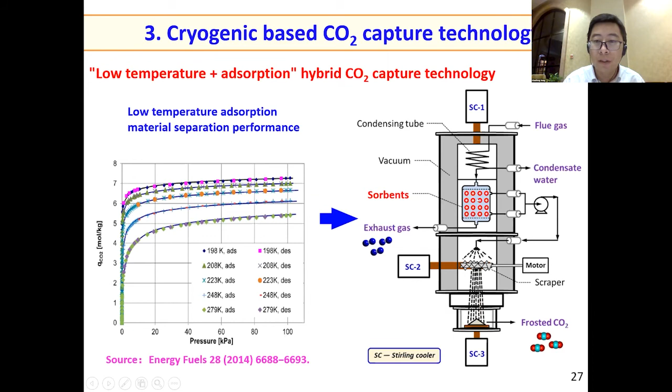And we also compare the different methods based on energy consumption. So we can see in the red color range, the cryogenic-based hybrid system can achieve lower energy consumption than the normal adsorption, membrane and absorption processes.

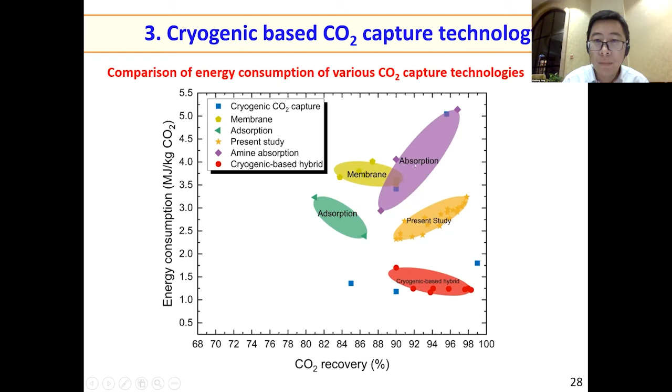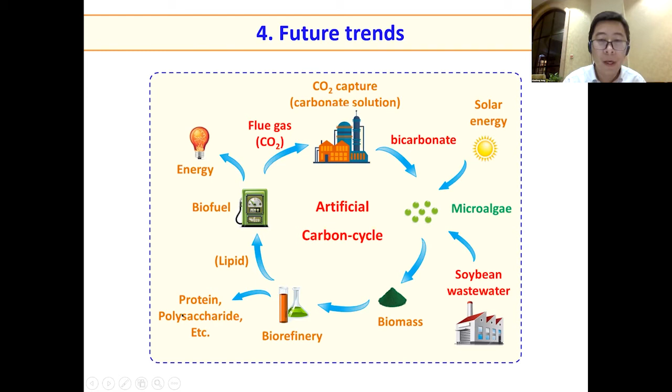So for the future trends, in my opinion, after we capture CO2, we need to reuse it. Now we have an ongoing Chinese government project to use microorganisms to transfer the high-purity captured CO2 into biomaterials. So in the future, we want to build an artificial carbon cycle just like this. After we capture the CO2, we need to transfer it into, for example, biofuels, bioprotein, biocarbohydrate and other useful biomaterials, biomass. So that's all.